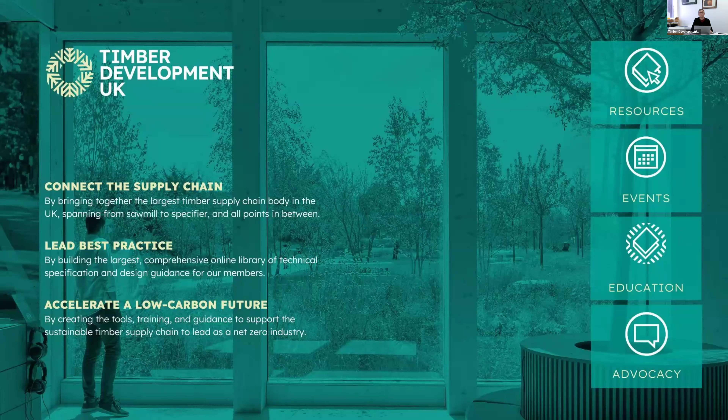Now we seek to achieve these three missions in a number of ways. One being webinars like the one you're watching. Another being the many other outputs that we have. You can see a couple of them there. There's Designing Timber. We have two flagship magazines that are printed: one is Designing Timber and one is Supplying Timber. They're packed full of innovative timber projects like the one that's the subject of this webinar, packed full of CPD and all the latest news about the timber sector and timber as a building material.

You can also see a couple of examples of the documents you'll find in our knowledge library. Our knowledge library is crammed full of timber knowledge sheets, such as the one you can see there on using SIPs, structural insulated panels. If you're interested in a particular timber methodology, you will find a timber knowledge sheet lurking in our library that will tell you all about it. It's a fantastic resource, and I suggest you make the most of it.

Another of our really good documents there, moisture management during construction. As many of you will know, moisture is an essential topic that you really need to understand if you're building with timber - how timber and moisture relate, all the things that are best practice when you're working on a timber project. And also you can see one of our case studies there, the Hive, a great demountable timber building. But you'll find plenty of other case studies on our website that can show you practical examples of the kinds of things you can build with timber and the challenges and opportunities that those buildings provide. Do make the most of our knowledge library.

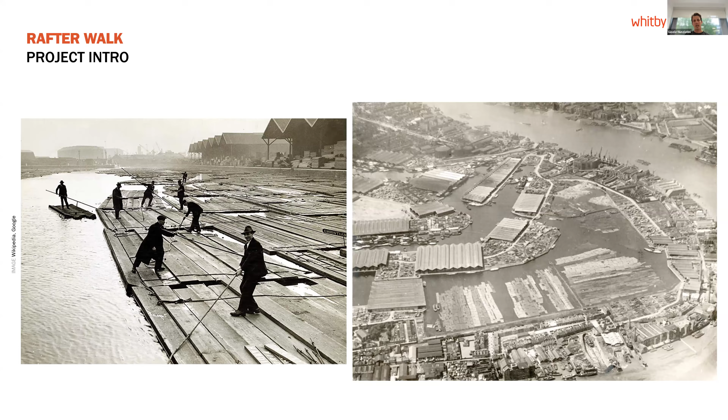This area then saw later redevelopment as, with the mechanization of the process, the need for these large docks shifted away from such a central area and shifted to a less labor-intensive set of operations. Being so close to central London, it was redeveloped in the 70s and 80s into a large master plan with a mixture of new housing, a bit of commercial space, as well as some green space linking them together.

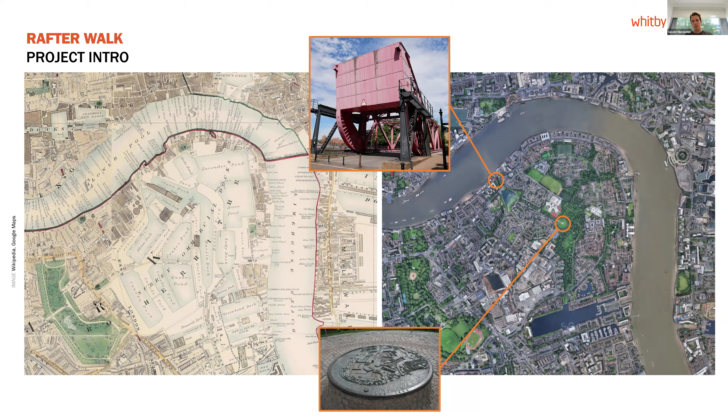So after this redevelopment in the 1980s, there's a more recent master planning redevelopment converting and repurposing predominantly the commercial area of the 70s development master plan into more of a central new neighborhood, taking advantage of the proximity to central London.

This has been pursued by the developer British Land in a joint venture with Australian Super to redevelop the area you see hatched in red between what's left of Canada Water and Greenland Dock in this area. So this whole predominantly commercial area is being redeveloped.

So the last bit of project introduction, setting the scene, basically focuses on Canada Water as a key part of this multi-year master plan, part of which was exactly Rafter Walk. This phase focused on the redevelopment of the dock as a whole, with a construction cost roughly split between 50% on landscaping and redevelopment and refurbishing of the site of importance for natural conservation.

So basically the landscape and the marshes around it, as well as this new link structure, this new boardwalk that is referred to as Rafter Walk today.

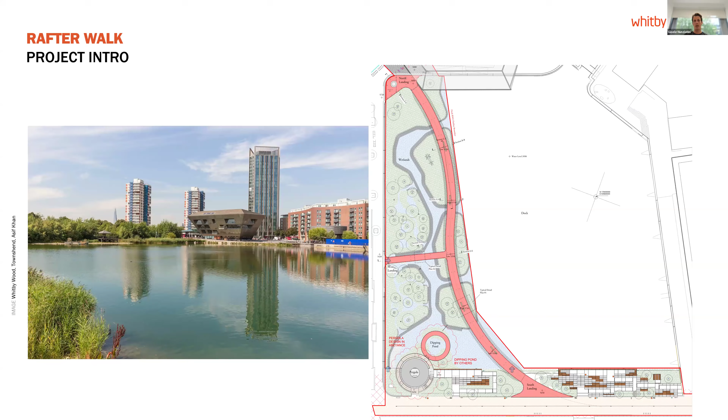So linking that history and heritage of the site to what is the design intent couldn't be done without an artist statement by Asif Khan, artist and architect behind the conception of this structure. I've put the entire statement in here. This presentation is being recorded, so someone can go back and read it in more detail.

But the key passages here that really express how that heritage has been fused with the proposal and the design that has ultimately been built are the two highlighted in yellow, which I'm going to read for everyone.

At Canada Water, I've been working with form, color, and rhythm as abstractions of motion and memories from the history of this dock, its timber cargoes, and forests and rivers of Canada from where the timber originated. Asif continues by saying: the bridge is a chronograph, a drawing that records time, capturing the motion of these individuals. It's easily forgotten that forests on the other side of the ocean helped build London. Many layers of that story are embedded here.

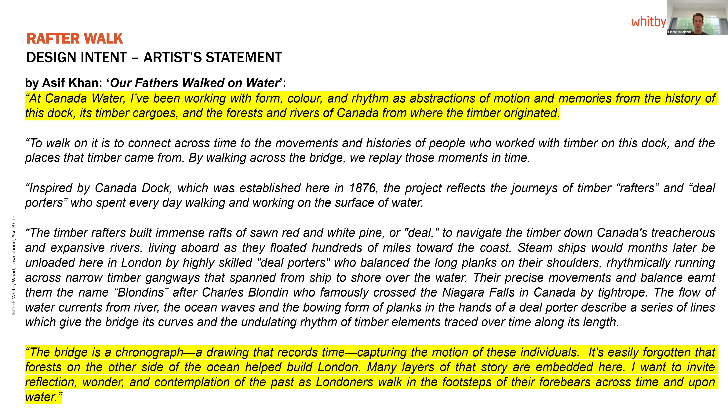I want to invite reflection, wonder, and contemplation of the past as Londoners walk in the footsteps of their forebears, across time and upon water. So you can see how the history and heritage of the site has been a key element in the mix, producing this design intent.

Here's just a quick overview of the defining aspects of that design intent. Obviously the shaping plan, as well as that undulated elevation profile, are key hints of that heritage being translated into form and baked into this structure.

There were a series of parameters explored through the design studies carried out in developing this concept. We spoke about the plan alignment and vertical undulations, but every other aspect was explored too. The design constraints from the site were limited in terms of clearance required underneath the bridge, which allowed the design to develop and stretch in a very different way, ultimately converging on this solution and proposal that's now been built.

So the pier design, the number of piers, was explored. The materiality was a big one, as I'll cover briefly, and then Martin will cover in more detail regarding timber specifically. But there was a great level of study done on the primary structure, the decking, the parapet, and the architectural fins.

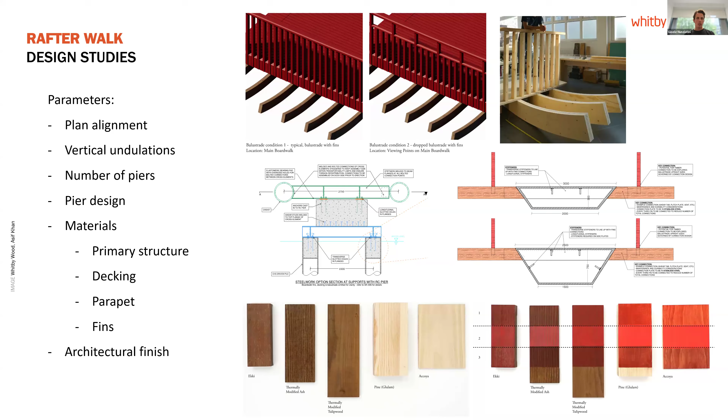Ultimately, the architectural finish, which is the first aspect of the project that the end user will experience, was also explored, but that was done in association with the materials and the overall combination of these parameters. So these design studies and this design intent culminated into a design solution, which we'll give you here as a summary, and then go into more detail into each one of these structural categories.

In exploring the materiality, there was a great deal of consideration given to durability, maintenance, sustainability, and so on. All of these came together and converged into this design solution and arrangement of different materials.

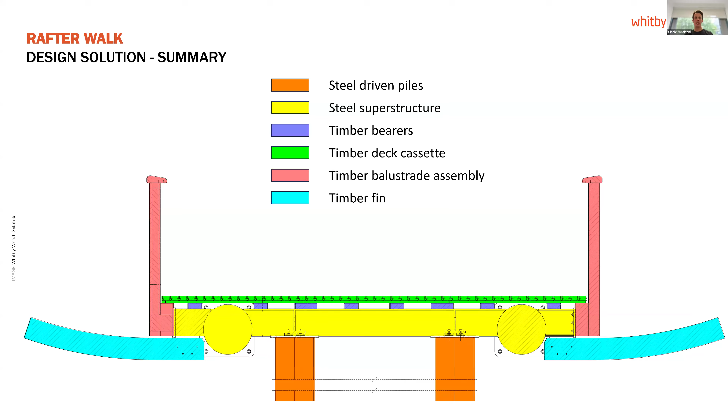So I'm going to now dive into each one of these aspects a bit more to give you an overview of why they were designed as such.

Starting with the substructure, what I like to always say is that no matter what the structure is, it will ultimately always be founded onto the ground, such as this one. So we had to deal with and mitigate the unknowns in working within an existing historical dock that in the past 170 years or so has been infilled, reshaped, and created this layer within the dock bed of made ground with obstructions and a risk of UXOs.

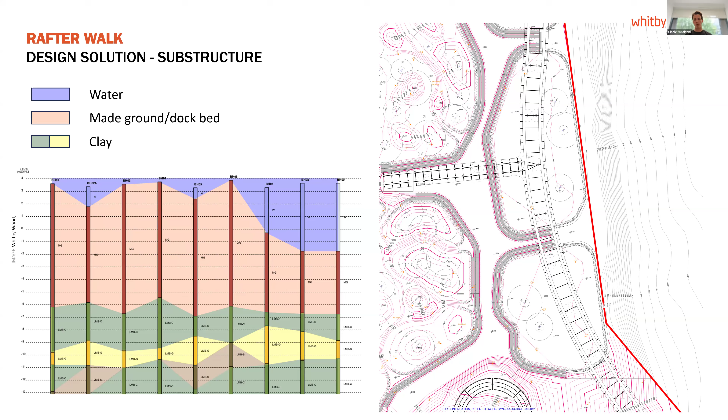This area was heavily bombed during World War II. So there was this element of that layer of made ground that we needed to digest and understand whether it was suitable or not. Here's a more diagrammatic representation of the typical soil profile, ground profile, and the proposed substructure.

Due to the level of uncertainty, it was soon determined that the made ground was not fully suitable for structural application, certainly for ultimate stability. Therefore, the structurally relevant profile is more like the one in the middle, where we have a layer of about 10 meters of unsuitable water and dock bed before reaching structurally competent strata, such as clay, where our foundations can transfer vertical and lateral loads. So our static scheme was more akin to the diagram on the right, where we had 10 meters before any lateral or vertical loads could actually be shed into the ground by the foundation system.

This means that although the Rafter Walk itself, the superstructure, is quite shallow to the water and to the landscape islands, from a structural point of view, it behaves more like a tree top walk, 10 meters in the air.

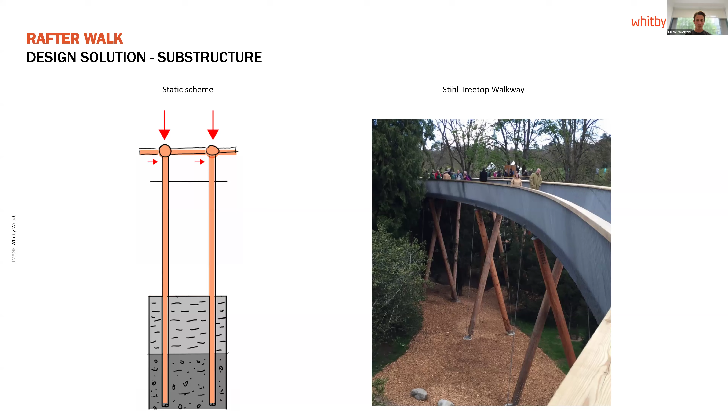So that is a key consideration that we needed to keep in mind in terms of its lateral performance and behavior against dynamic loads and thermal loads. As a summary, this is the substructure solution.

The predominant solution for the Rafter Walk and its link bridge was pairs of CHS driven piles. Quite a positive story in the fact that we were able to reuse an existing stock of steel tubes and repurpose them as steel-driven piles.

There's a bit of a sustainability win in there. And then when we come to the ends of the north and south abutment, we needed more laterally competent restraints for keeping the overall stability of the structure in check against its desired performance.

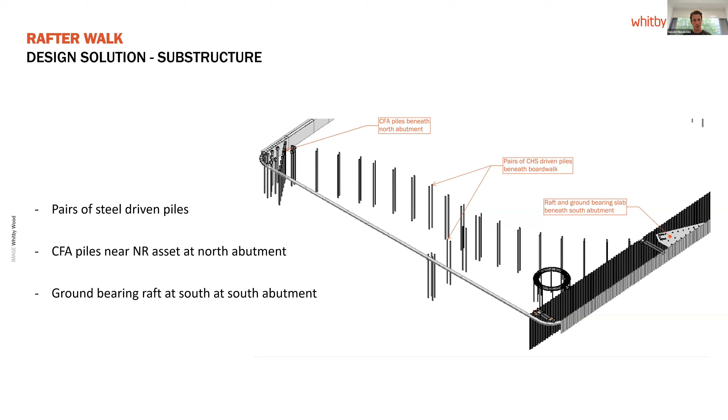So we have a ground-bearing raft solution at the south abutment onto ground stabilized and ground improved dock bed, as well as CFA piles at the north, closely spaced. The change from steel-driven pile to CFA pile was partially driven also by the proximity to the underground network rail asset in the form of the masonry tunnel for the overground line that goes through here.

Moving away from the ground and into the superstructure, the main bridge forming the key central portion of Rafter Walk has a simple ladder-like plan structure with the arrangement of two primary longitudinal CHSs coupled by primary cross elements highlighted in yellow. These primary cross elements had the function to take the loads back and connect them to the piles, represented as a pair of circles at either end of this plan view, but also to couple unbalanced live loads between one side and the other of this boardwalk.

The width of the boardwalk is 4.2 meters, so it could have some unbalanced live load pattern from one side to the other that would generate torsion in this ladder, and that was taken out by pairing the elements and coupling them with cross elements.

Secondary cross elements and cantilever stubs also have structural function, but it's more related to supporting the balustrade assembly as well as the decking solution, which I'm sure Martin will cover in more detail in terms of sensitivity done there.

The key consideration here, clearly visible in plan, is how the primary longitudinal CHSs are slightly recessed from the tip of those green cantilever stubs, as well as how the piles are then further recessed in rather than placed underneath the primary CHSs.

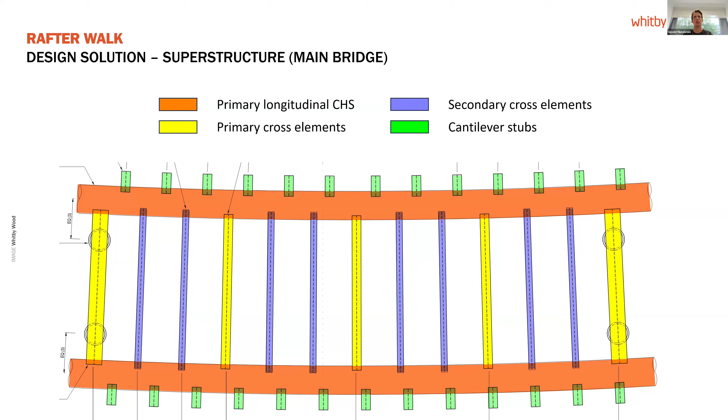A similar solution and design philosophy was adopted for the link bridge. The link bridge provides access to the middle of the main bridge of Rafter Walk, and at the same time works as a key lateral restraint for that lateral behavior we spoke about just a minute ago.

Due to the simpler geometry, there was no requirement to use CHSs. This was straight in plan and with a sloping elevation, but without any undulation, so it was easier to use open sections and streamlined fabrication.

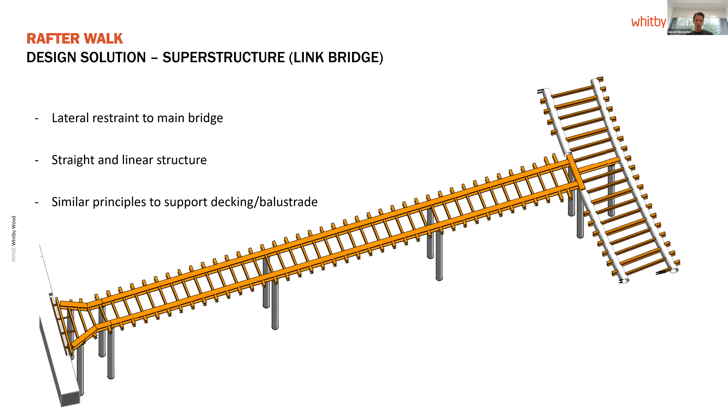Moving to the ends of the main boardwalk, we find the abutments. As I said before, these needed to be able to take lateral load independently without being connected to the existing dock walls, due to uncertainty regarding the capacity of the historical portion of the dock wall.

So this took the form of steel structures, again clad in timber, using the same principle, extrapolating the same principles for the balustrades and the decking as the main boardwalk, but essentially with more lateral capacity in the form of a U-shaped shear wall at the south and introduction of some vertical bracing in the north.

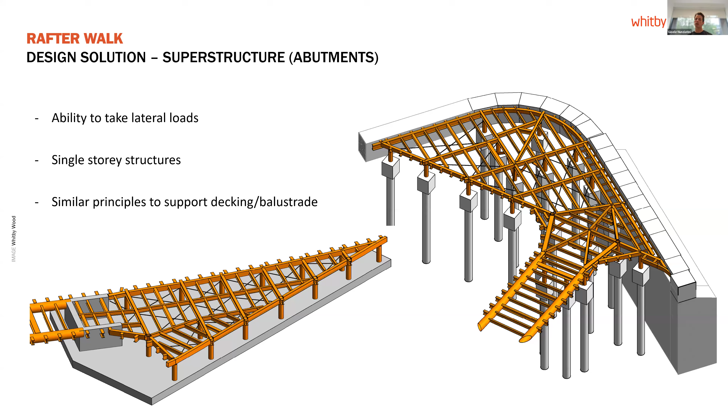Moving on to the details, I'm just going to touch base upon this. Martin will go into more of an in-depth review. There was, during stage 4.5 and stage 4, as well as throughout stage 5, a great level of conversation with Xylotek as main timber contractor.

As well as the main steel fabricator, in terms of understanding the interfaces, understanding the fabrication challenges from one material to the other, site tolerances, and as well as trying to optimize as much as possible the level of details.

So digesting what is an undulating S-shaped type of geometry with ever-changing angles between the steel and timber elements, and trying to streamline it into a type of detail that offered the maximum repeatability. There were typical details and bespoke details. We had to think about how to marry different materials, how to marry the superstructure to steel-driven piles, and take out those tolerances. But I'm sure Martin will go into more detail about the intricacies of these aspects of the design.

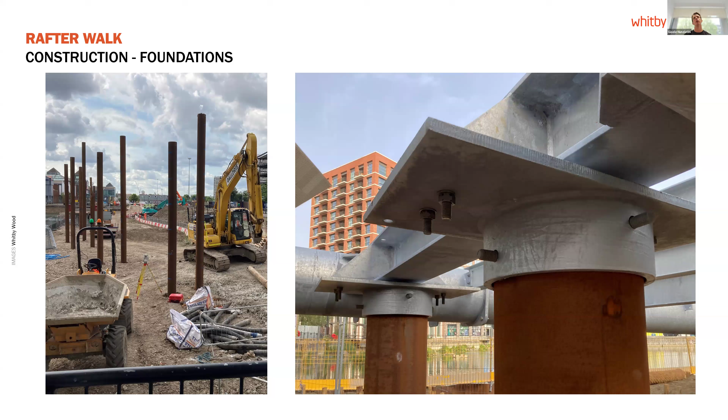Steel was entirely fabricated off-site, delivered to site in the largest sections possible, and then erected onto those plates and bolted together so that steel construction on site could happen quite quickly.

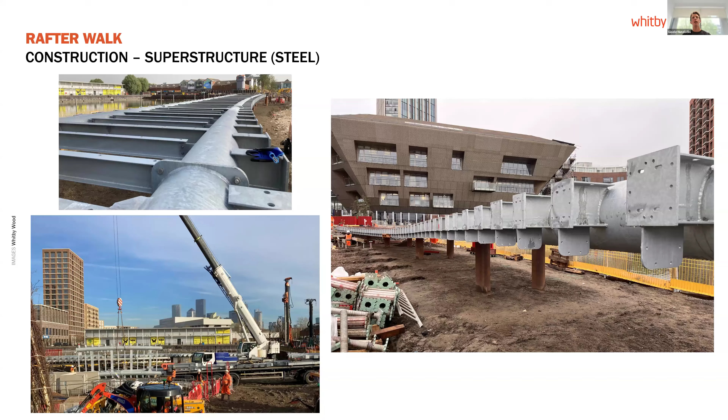And then timber started coming on - again Martin will cover this - but as much as possible favoring off-site fabrication in terms of creating modules, cassettes that could be brought to site with the minimum amount of site intervention, just adapted for tolerances and geometry to suit.

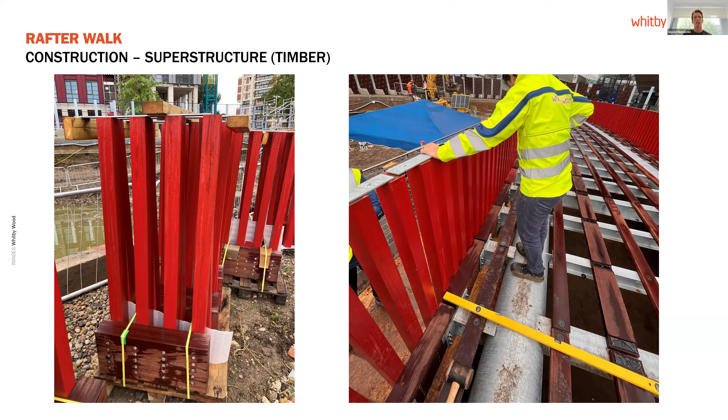So the balustrade would come on, then the bearers supporting the decking cassettes would be installed with some elements of site adjustment and site drilling, and then ultimately the cassette would make it to site and deck out the entire boardwalk.

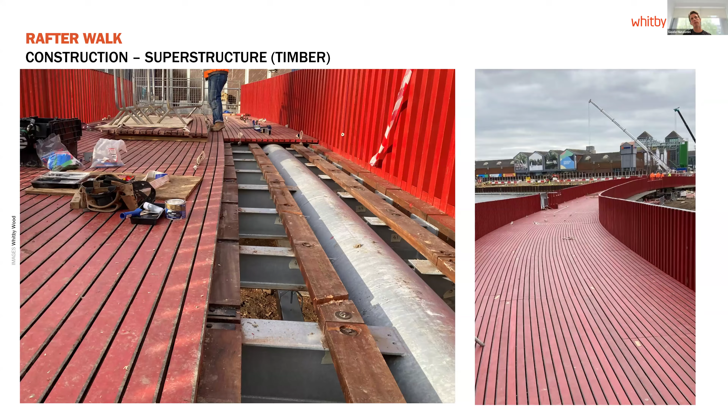Last but not least, the finishing touches. We spoke about the architectural fins that project from the underside - those were some of the last pieces to be installed, same as the site-finished handrail, and touching up of paint as and when required.

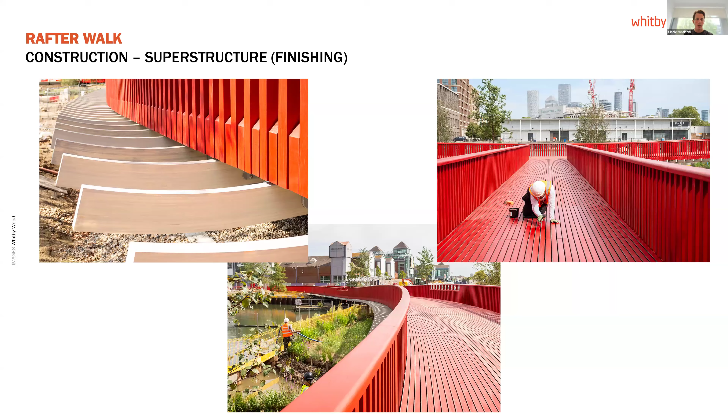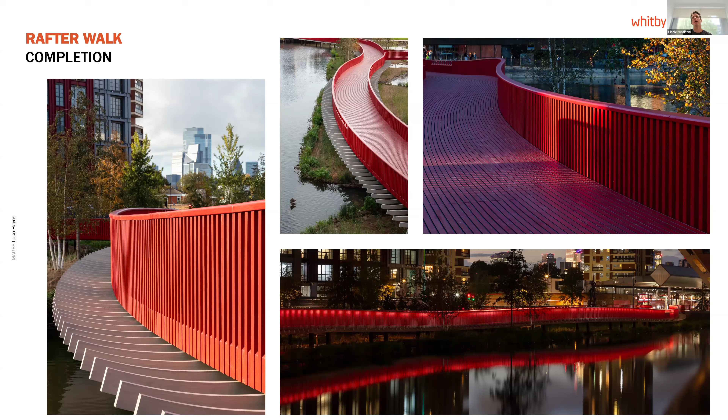So that brings us to completion. A couple of nice pictures here for those that haven't been there in person or haven't had the chance to go yet. These were taken just after its inauguration, and you can see from the bottom picture how carefully hidden away and designed the lighting was, so that it's not visible during the day, but through its dimmable features can be used to enhance the form of the structure and its appearance at nighttime.

That brings my part of the presentation to a close. I'm just going to stop sharing and pass it on to Martin.

Great, thanks, Joel. Fantastic introduction and handover. So yeah, I'll talk a bit more specifically about the timber elements and the process of their detailing, fabrication and delivery on site.

Just to introduce myself, I'm Martin Self, design director of Xylotek. We are specialist subcontractors doing timber structures and also consultants, so we get involved in projects early and help steer them into realization. We specialize in non-standard structures, so quite a diverse portfolio - non-standard in different ways, whether it's complex site conditions or complex geometry - looking to enable timber projects where there's a challenge to solve.

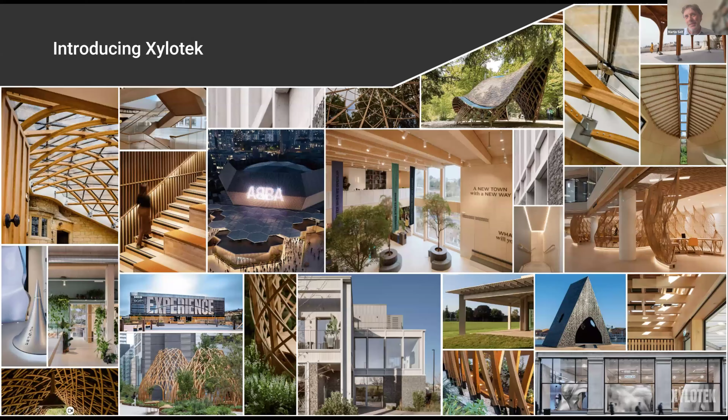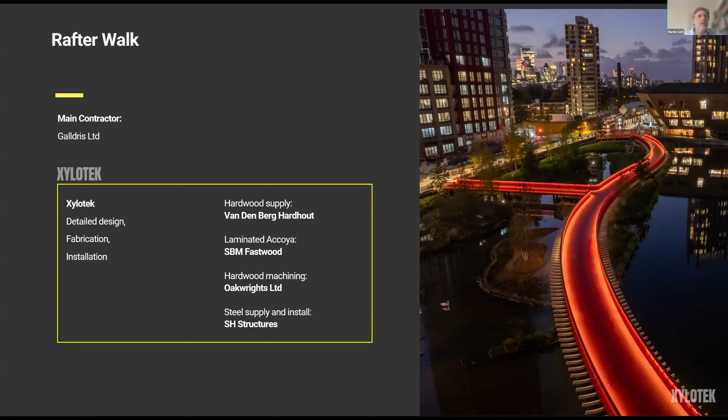Let me just pick up - that was the Xylotek introduction page, just a sense of our portfolio and the mix of projects. Here I was listing the team with us. So I mentioned Van Den Berg, the hardwood suppliers, a Dutch company - the Accoya, the material of the fins, came through SBM Fastwood. The key machining was done by Oakwrights in England, so we worked very closely with them on the DFMA process. The steel was by SH Structures.

So I'll talk about how we turned this into reality - how we took the engineering and architectural principles, clearly conceptualized but not yet ready for manufacture and realization, and went through those stages of taking that stage three level intent into something realized. Maybe just to recap some of the principles behind this.

Steel substructure, but the visible and contact material is all in timber - that's the prime element of the expressed structure. It's a 120-year life; durability is really key. Then there's a key element of modularity and the ability to pre-assemble, bringing elements efficiently to site and doing an efficient construction assembly on site. There's a clear hierarchy between the elements of steel, the substructure, the balustrade, the deck, and the architectural fins.

I think maybe to mention there's a real tactility and solidity. If you feel this structure, it has this fluidity, but also a very good sense of the density of the wood. You can touch it, you can really get a good interaction with the materiality.

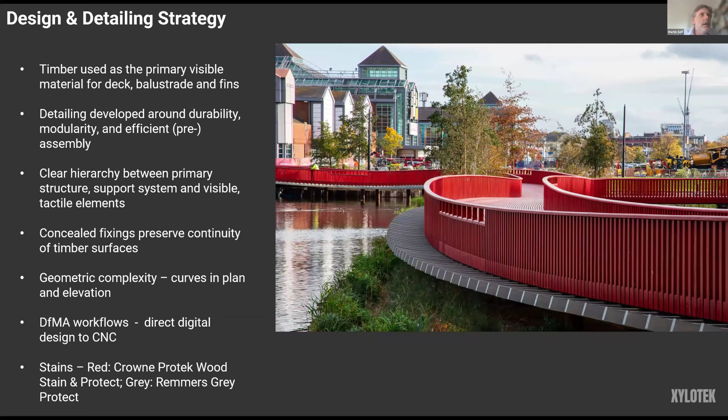So I'll talk a little bit about the timber supply and the procurement. Then I'll go into specific elements - we'll talk about the balustrade, the deck, how we delivered those, how they developed, and then how everything came together.

It's a major piece of London infrastructure - I think actually the first long span water crossing since the Millennium Bridge. It's a key landmark feature, so a long design life and durability are absolutely essential. Right from the outset, it was driven by the need for durable hardwoods to be deployed in this, and for it to be done through full FSC certification, with absolute clarity on the chain of custody and the sustainability of the sourcing of that wood. Various stages were gone through there, with different options and commercial considerations.

I think the Eki that was in those original considerations evolved into the Cumaru and the Red Angelim that I talked about here, Brazilian supply.

Just to mention as well, those sculptural fins that sit to the side - they are purely sculptural elements, capturing the flow of the form. They're made of Accoya, that acetylized pine material that's then glue laminated into those curved pieces that stick out the side.

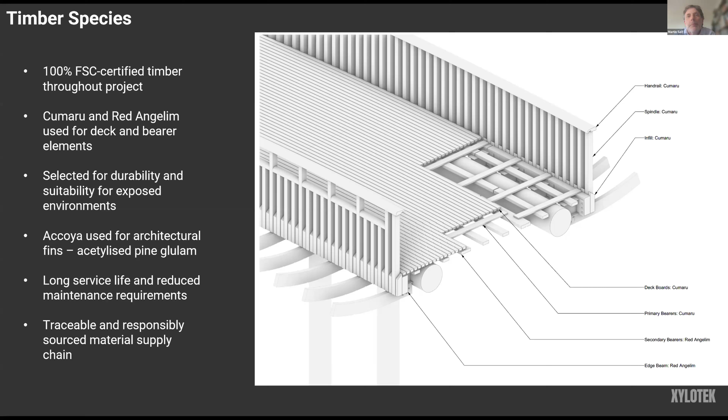Maintenance considerations are obviously key, and fundamentally the supply chain consideration is really important. Just a bit of data on those species - dense tropical hardwoods, I think in the pea family, growing up to around a meter diameter, both highly durable, class one, both in that high strength D50, D60 category.

The red angelim is more consistently red. The Cumaru actually varies a bit between yellow and a redder color. Both are around the density of water, so you don't want to drop it in a lake - it would sink potentially.

Hard to work with, particularly the Cumaru, tough on the machines - you have to pre-drill everything. You really have to think about the manufacture because it's very different to even an oak, a UK hardwood, very different to work with, and very, very different to a softwood.

Interesting - the red angelim has a rancid smell. There's an acidic kind of chemical within it that gets released as you're working with it.

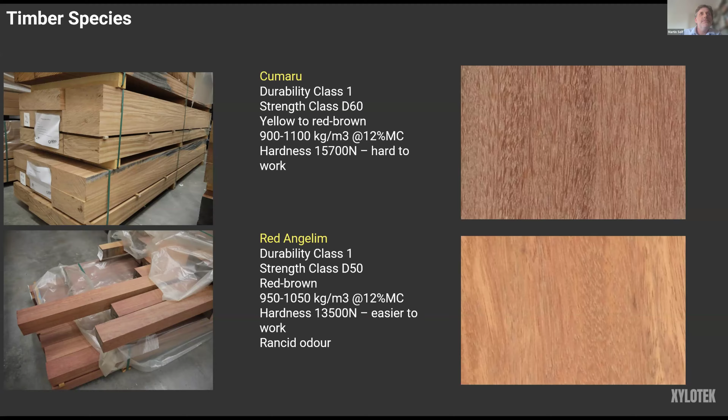So as I was mentioning, the chain of custody and confidence in the sustainability was really key. Vandenberg's are the leading European FSC-led international hardwood supplier. We sourced through them, which gave very strong confidence to the client and the wider team that we were sourcing responsibly.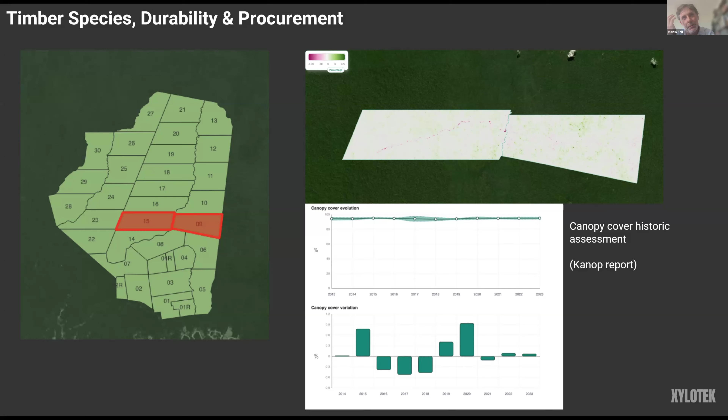British Land actually commissioned independent assessments to audit that supply chain as well. They went right back to the data and plot from which the trees were sourced, and this company Kanop did a retrospective analysis of satellite imagery of those plots to track year on year the change in canopy cover as a measure of sustainability of the forestry there - confidence that only a small percentage of trees were being felled, in a way that preserved the full ecology of the woodland.

Okay, so I'm going to talk about a couple of elements in particular which illustrate the process and thinking. The balustrade design is, in a way, quite a simple thing - some vertical spindles, a handrail, and a way of fixing it to the main bridge deck. But the complexity comes from that curvature, which brought some interesting considerations in how we reconciled the fabrication, pre-assembly, and assembly with that geometry - that's the story I'll tell in the next few slides.

The left image shows the radial setting out - there's an 80 meter and a 90 meter radius. I think the top segment in the image is the 80, and then it goes to the 90 in the other part. So there's a sort of rationality to the curvature in plan, but there's also curvature in elevation.

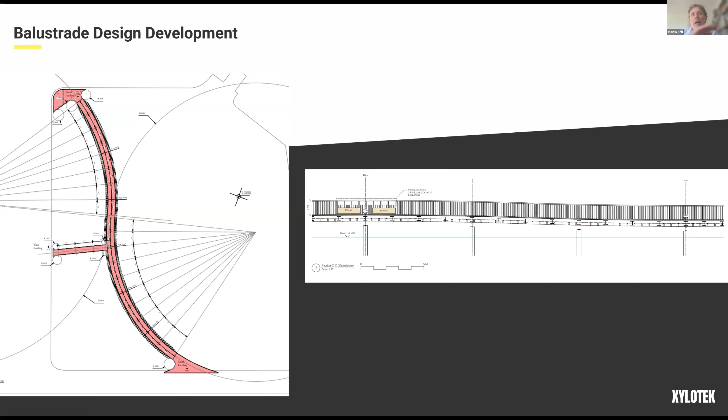So it basically means there's no real commonality in the balustrade elements. We went down the route of accepting that every part of the balustrade would be geometrically different, worked with that, and then worked through a logic of assembly that allowed that to happen easily. This captures some of the design evolutions.

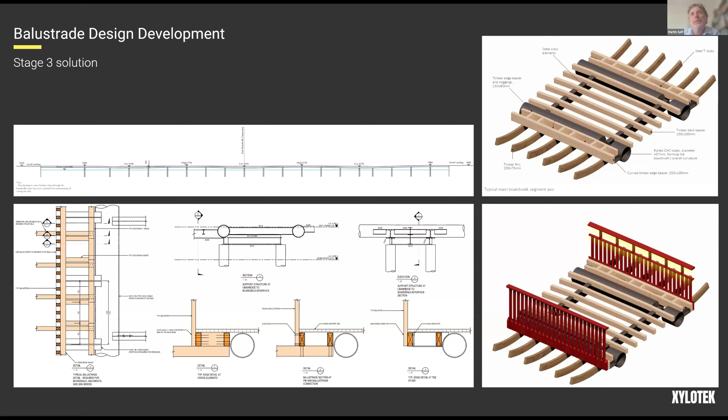So there's a lot of work done to think through how to evolve that into something more cost effective and easier to realize. There's a few moves - breaking down the balustrade panel lengths into shorter pieces.

You can kind of see here - using a shorter faceted element, just getting clear about the principles. Having an edge member that was straight and varied with the elevation angle, the up and down, but the spindles all kept truly vertical, pointing in the true Z dimension. So they were kept consistent, not changing angle with the curve of the bridge.

Lots of studies done about the relationship of the steel and the wood, and the possibility of the ladder and exactly what did what. The need to pick up the fins as well onto something good and solid.

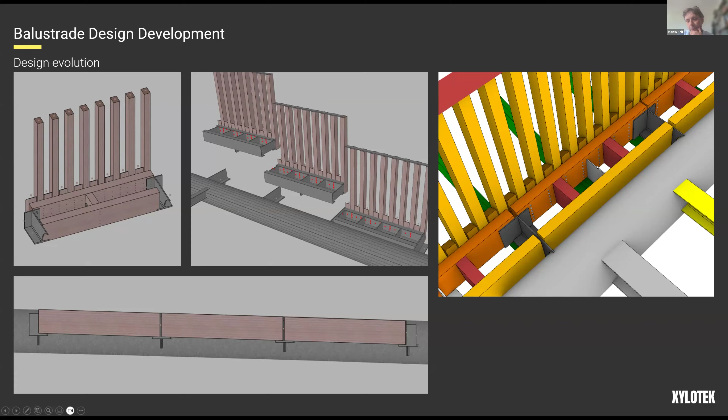So things ultimately came to, I think Joel showed this earlier, a simplification in a way of having a steel stub as part of the steel structure welded to the CHS, picking up a single edge beam in straight facets, and also the same element picking up the fin - spacing them at the fin dimension, bringing everything together, making the panel smaller, easier to handle.

I think just about two people could manhandle them into position, then bolted back with hidden bolts into the steel there that you can see, and then those infill pieces coming in at the end, cross-screwed in a hidden way so everything was tied up. You can probably pick that out in the right-hand image there.

Some of the spindles had holes drilled all the way through them vertically to pick up the cabling for the lighting - quite a lot of specific detail within there.

The right image now shows just the screw fixing of the spindles. Looks simple, but I think quite a lot of work for Whitby Wood to get this refined - getting the edge distances justified, getting an optimized relationship between the spindle dimension, the spacing of those, how everything tied together.

So, like Joel was saying earlier, a lot of very close interaction between us through stage 4, with the design anticipating fabrication, and the engineering and architectural working together. So everything was synthesized really well.

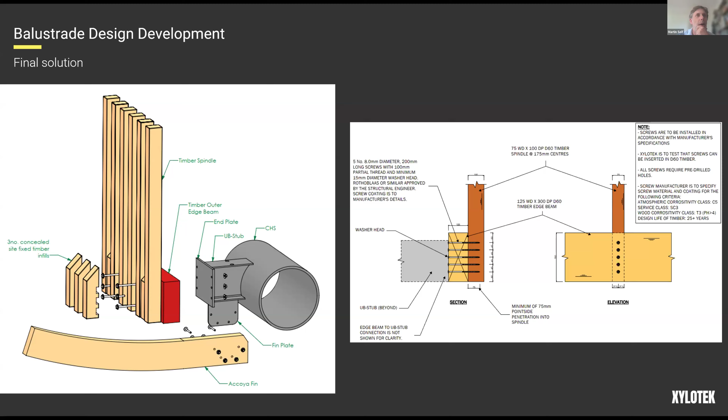So this is then the story about how these things were actually worked out. Let's talk through this a little bit.

So the edge piece, the bit that's bottom left nearest us with all those screw holes, that was fabricated by Oakrights on their Hundegger machine - a CNC machine, not normally used by them for oak framing, but used for the cutting of these elements, for drilling all the holes, all the counterbores, all done digitally.

Each one of those different all the way across the bridge - I think 500 or so different pieces, adjusting for the angles as it flows along. So a very careful definition of those digitally, fully three-dimensionally defined by us, and then fed into their workflow.

We actually, because we had the digital information ready to go and held in cadwork - the software that's specialized for timber construction - we were able to go straight into exporting the machine file, the BVN file that drives the Hundegger, saving a lot of time at the fabricator, at the machinist side. They could just take files in a good, controlled, organized way. We could sequence them in the order we needed them, straight into the machine fabrication.

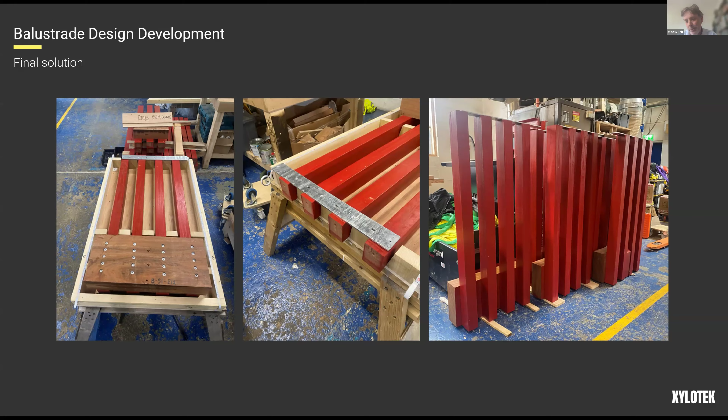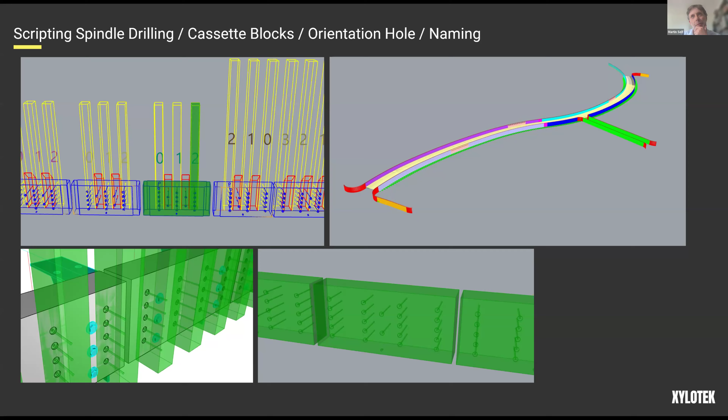So there's quite a lot of special conditions alongside the ones that are more consistent. As I was saying, we're modeling every screw hole because they're pre-drilled, every counterbore, every single screw in the whole bridge is modeled in the cadwork model. Tens of thousands of components to get an absolute definition of everything, and then control of all of that.

So naming of every piece, the sequence order, the specifics of all of that, how things will come, the simulation of the actual machining being done. So the Hundegger machine doing its operations virtually to give confidence that the reality could be made, that you can get the tool paths to work, that things don't clash.

That was a special piece, the one shown top right, one of the corner bits where there's some extra machining cuts to get around a curve.

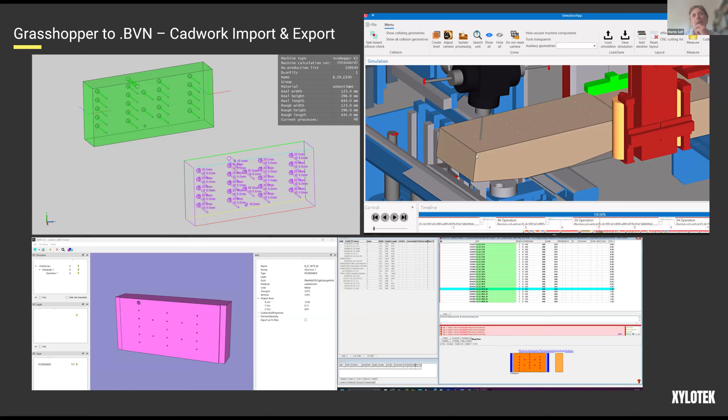Anything else to say on this? I mean, you get the idea probably. It's just a process of going from the global setting out geometry, the reference geometry logic that's defining those radiuses and curves in elevation, all the way through to the center line, the positioning, the setting out points, the structural center line geometry that Joel will be working with, through to the full volumetric definition of all of these features on every piece of wood, maximizing the automation of that where we can. Quite a lot of work done in Grasshopper and Rhino alongside the Cadwork work.

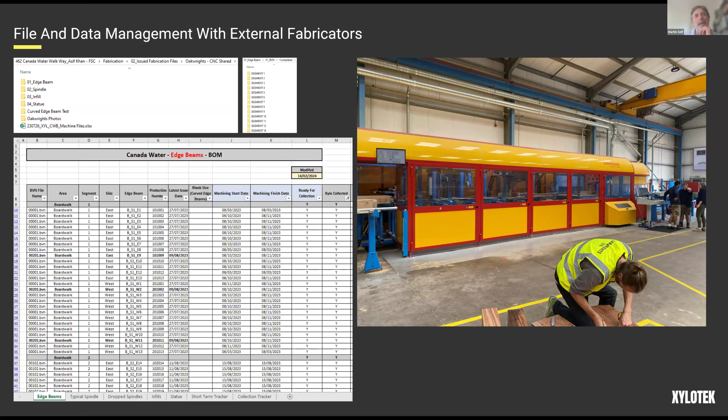That's a machine in the background and the sort of information we're giving. So we're asking them and really planning out day by day exactly which bits they're going to be doing, because we're then needing to feed it in - I think Joel's image showed the flow of the bridge, the construction going from one end to the other, that was the reality, so we had to sequence things carefully in an order that matched the assembly.

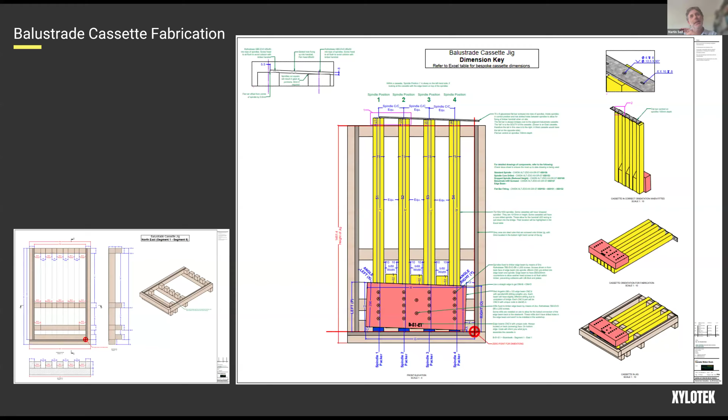And very simply, rather than doing a drawing of every piece, there's just a spreadsheet with the key dimensions, labeled D and C and B here, so the dimensions that would set the corners of the edge member within this frame. There's a series of these things made, and then the data for that driven out of a Grasshopper script. One of our team, Marina, worked very closely on this.

So yeah, Marina and Nate, amazing designers, spent a lot of time thinking through how to get all of this rigorously worked out and a workflow established that would give the data for this process, as a lot of it is done in the Grasshopper and Rhino world, outputting those numbers.

I think this just runs as a video. You might just about get a sense - you maybe see where my mouse is pointing that the edge beam is sort of moving around as it's working its way along the bridge, and those dimensions being adjusted in each position.

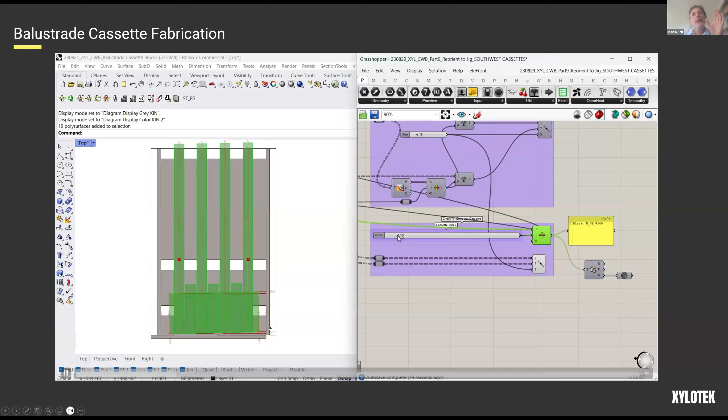So basically those millimeter dimensions are what are given to the team on the workshop, and then they set those against the tape measures here, all pretty simple, fairly robust, easy to check. There's a set of check dimensions as well as the set out dimensions.

So these blocks, which have come from Oakwrights, dropped in, positioned to the data, and then the screws put in. And that's it really. That done 500 times, producing these pieces. You can see here this bit of steel becomes the top plate, so that gets screwed onto the top. There's a line that runs through the top of the spindles over that, and the handrail piece gets fixed up through that steel plate into there.

I think if there's anything else to say about that, but you see the thinking behind it, how to take the complexity of the geometry variation into something that actually in reality on the workshop floor could be simple enough to be able to do consistently and efficiently.

There they are, the families of them going out of the workshop, sequentially going out, craned in, moved around. You can see the fixings that I showed earlier there coming into place.

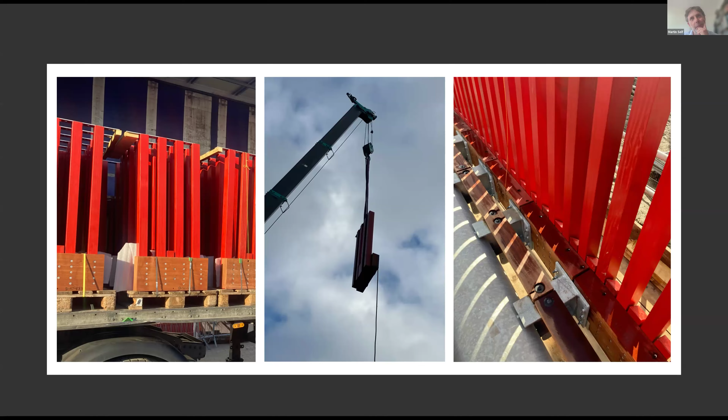So, the balustrade, maybe just to mention the handrail. This is actually the mock-up, a sort of softwood mock-up of the detailing there. So quite a bit of complexity in these. This is one of the more tightly curved bits.

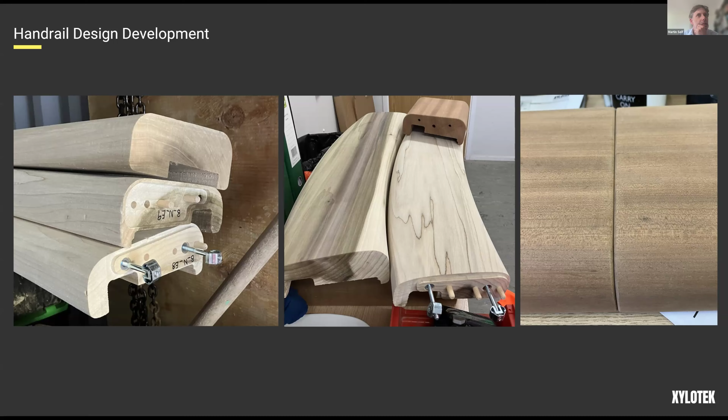I guess that leads us then into talking a bit about the deck, the other prime element. Another set of challenges here - again, dealing with the curvatures, that curvature in plan in particular.

An absolutely key architectural move was to run the deck boards longitudinally along the flow of the bridge. I think if you think about most bridges, you'd probably run the boards laterally - it's obviously easier to just run them perpendicular across. Running longitudinally and curving them presented some good challenges, and we'll talk through that for the next minute or two.

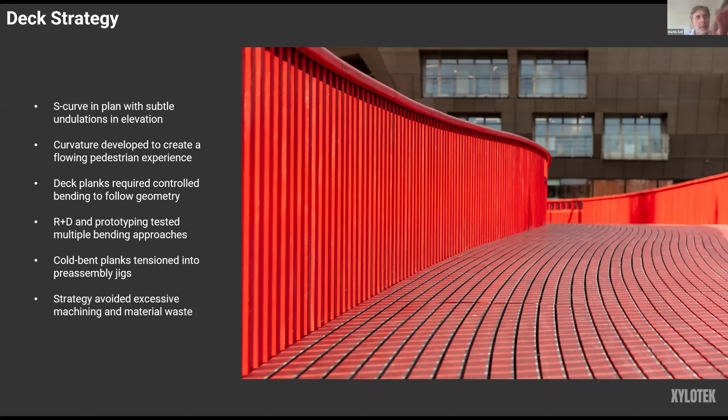So that flowing pedestrian experience was really key. Lots of R&D, lots of back and forward, lots of workshop testing, prototyping, and then back and forward with Joel's team, really trying to understand how we best do it.

Again, lots of variation, a bit less this time because we were able to run with the radial geometry. So there's the 18, 90 meter radiuses, the sets of panels, different lengths worked out in a way that the joins would always miss each other by, I think, 250 mil as a minimum. So long, short, medium lengths of the panels, self-similar along the oranges and yellows, and then different on the other set.

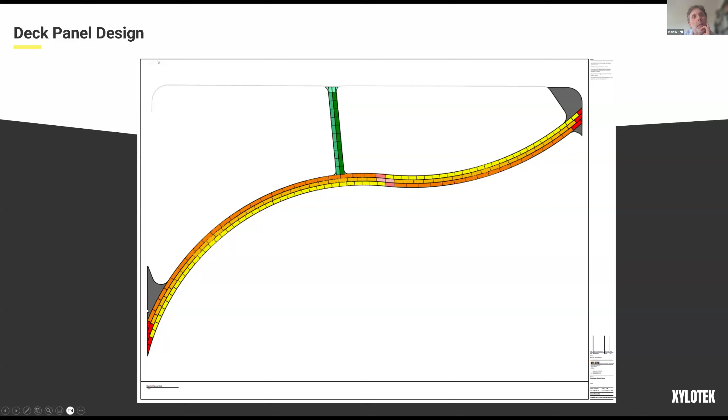So 6 standard ones, the straight ones on a link bridge, and then a bunch of specials at the ends in the abutments. And then the grey bit's actually done more in situ - those are patches of decking done at the abutment ends.

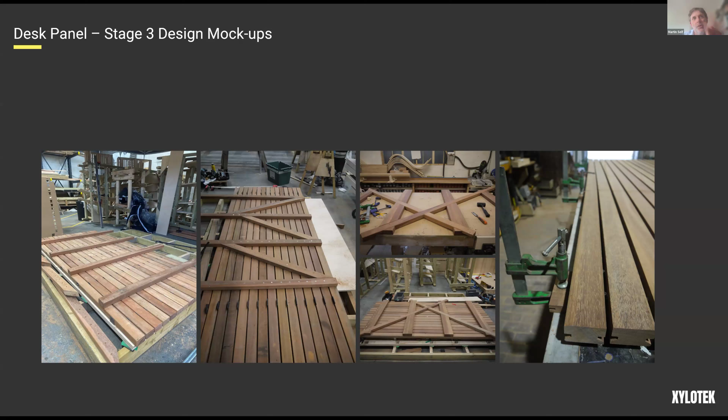Lots of early stage testing. The idea was to be able to curve those deck boards, and lots of different options were thought about. These are versions with an all timber deck, locking in curvature with a kind of truss arrangement in the wood.

This is testing the more extreme end of the curvature. The steam box in the back - so we tested steam bending, which is actually quite inconsistent and laborious, and probably too time consuming for this.

So the ambition was to be able to cold bend these, just elastically bend the pieces in the pre-assembly. Another option would have been to subtractively machine the geometry out, to take the profile out, because of the complexity of this profile, that has recesses for the fixing, a relief cut, another cut for the anti-slip strip to fit, to machine cut that in a curved shape. That's very complex in itself, and also wasteful because you'd be cutting a curve out of a wider straight plank, and this wood's very precious, so we don't want to do that.

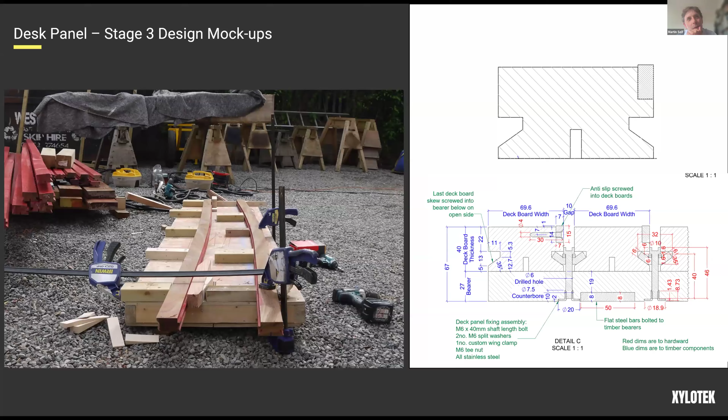So the process developed to go back to that truss idea, but to do it with steel cables. Below the deck, there's a couple of steel edge members, chord members in the truss sense, and then the tension cables, positioned where they need to be to lock the curvature in. So you could bend one of those boards by hand, but when you have 17 of them laid up, they cumulatively add up their spring back, so you really need to lock in that geometry really carefully.

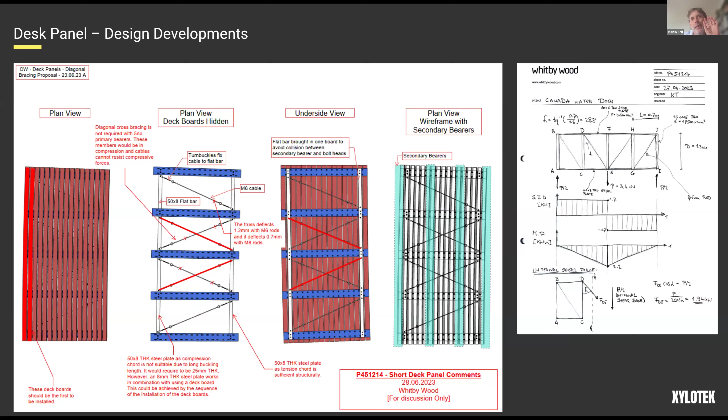So these are pre-assembled panels, done in the workshop, and then carried to site and dropped in one by one. These are the Whitby Wood comments on our drawings, just to show you the amount of backwards and forwards and refinement having to go on in thinking about this.

And here we are. This is now the reality in the Xylotek workshop. CNC jigs for each of those different conditions I was mentioning, setting the positions of the chord members, the secondary bearers, and then paths where the steel cables come in.

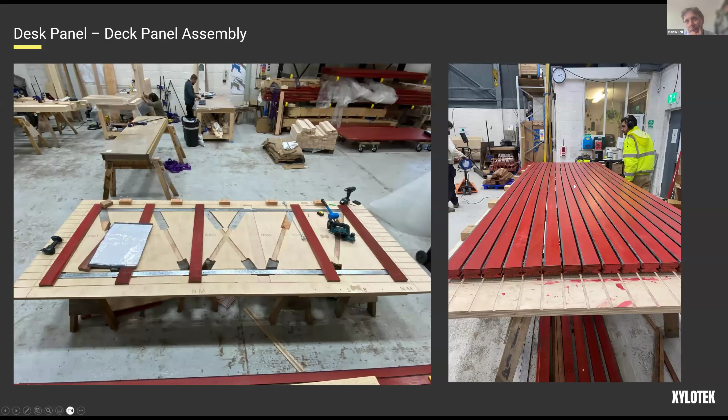You can get a sense of the curvature that's been locked in. The staining happens at that stage as well. Another view of the jig there with the cables coming in and the turnbuckles and the tightening that gives a little bit of adjustment if needed to get the collective curvature locked in.

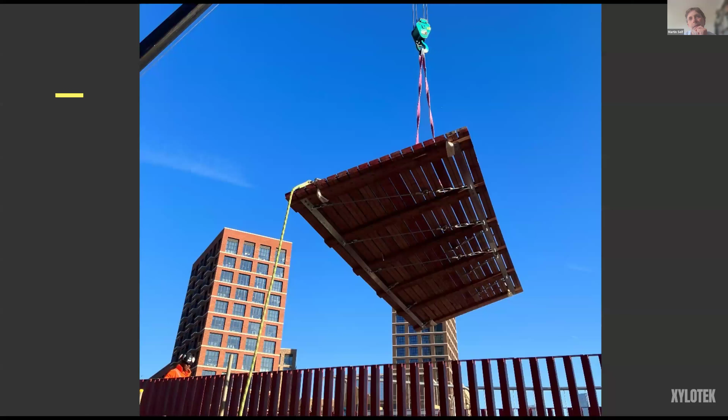There's a panel coming in, so very nice, totally pre-assembled, locked in. No need to deal with those springback forces on site. They're now self-contained panels and able to be flown in on site.

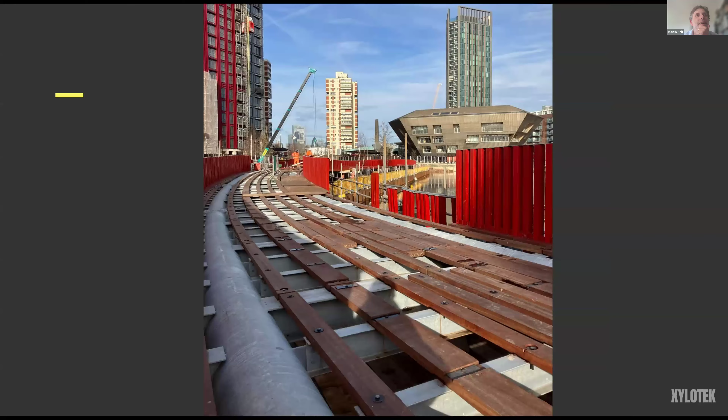I'm just going to rattle through some site pictures. You've already seen some. The steel and the primary bearers coming in, starting to move along there again from one end to the other. Now the balustrade pieces coming in, like we were talking about.

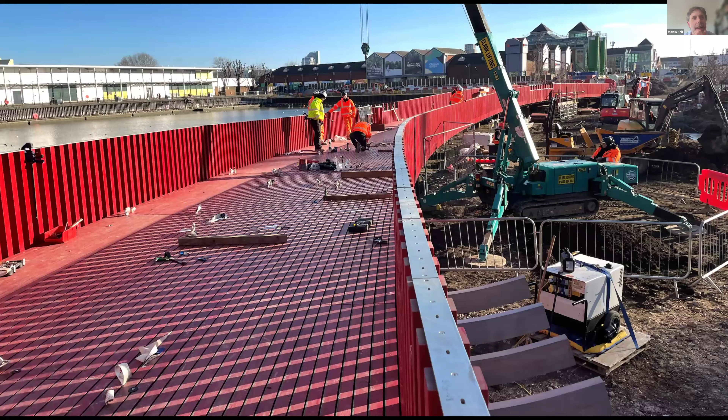More progress. Looking from the other end, deck panels starting to arrive on the right-hand side there. Some need to sort of shuffle and line up, but generally things working really, really nicely because of the care taken in the workshop to get everything in the right position.

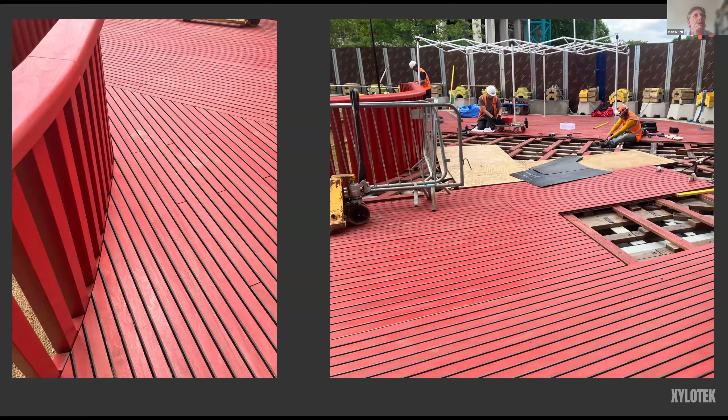The coil fins coming in. Mentioning those abutment areas where there's larger areas of decking, and some nice transition from the deck flow into just parallel planked zones.

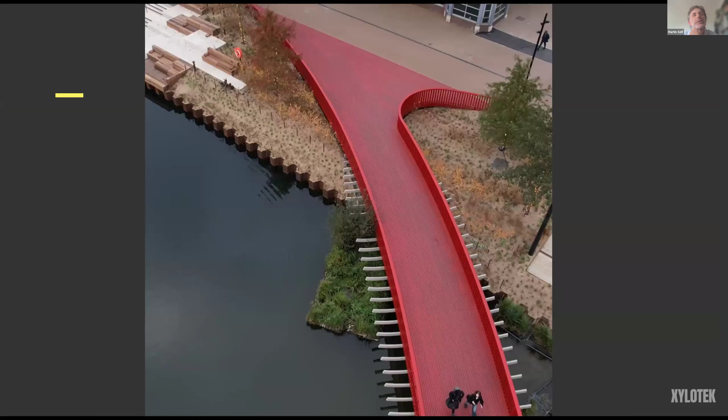Having to navigate the tight curvatures at some of those abutment and connection zones, so a bit of hand crafting, I suppose, on site to deal with those ones. But you get a feel for it there, just how the bridge nicely flows into that end zone.

Yeah, that's pretty much it. A couple more images.

We're probably slightly over time. Apologies. I guess, Joel, I think you were maybe going to jump back to just another little anecdote. There's another separate bit of structure that Xylotek didn't deliver, called the dipping pond, which has its own interesting story around some timber piles that Joel knows the story of better than me. So I'll hand over to him at that point. You can be very quick, Joel. Yes, yeah, will do. Thanks, Martin.

Back onto this presentation then. As Martin said, there's a secondary structure away from the main boardwalk, away from Rafter Walk, called Dipping Pond, later redubbed Discovery Pond, which adopted as much as possible of the same principles, that ladder structure, superstructure, and so on. But due to the smaller scale and lighter loads, smaller balustrades, no fins, we were able to actually use timber as a material for the piles, for some of the substructure supporting this.

Again, we used the similar ladder superstructure supported on pairs of timber piles. But these timber piles basically created some site challenges, because when it came time to drive them into the ground, unfortunately they hit some obstructions that meant the tolerances were greater than previously considered in the design. Further to that, the size required for driving them into the ground was larger than the size specified in our design for connection to the superstructure.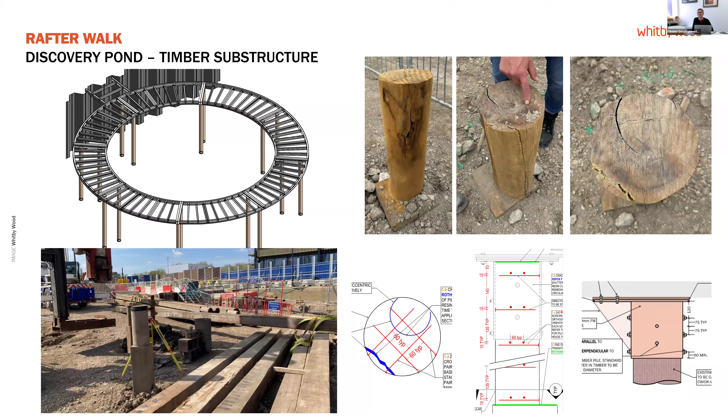We might overrun slightly. I'll just note that a couple of people asked about concealed fixings. For purposes of time, I'll mention that Gioele, you pointed out most of the fixings are visible from the underside of the structure, since people had asked about inspectability. You also pointed out that truly concealed ones were generally not crucial for the primary load path. I thought it was interesting how well you'd done that, the fixings that at first glance would seem completely invisible can actually be accessed from underneath for inspection. I don't know if there's anything else you'd like to say about that.

Between Martin and myself, we've shown this detail on the left that you can see here. These concealed infills with a sloping top wedge finish were used, and correct me if I'm wrong Martin, but fixed from the back to conceal the primary fixing. So you can inspect the primary fixings or remove some of these concealing elements to quickly inspect them from the outside. Everything else should generally be visible, either from the top, because the fixings of the decking are just recessed in between the decking - you don't see them but they're visible if you focus on them - or from the underside predominantly.

You also typed a very good reply to somebody asking about structural design life and durability considerations. I was going to ask about that too, in terms of corrosion and that kind of thing, with exposure to the elements, obviously moisture, both with the steelwork, the connections, and the timber. I'm wondering if either of you would like to say a bit more about that.

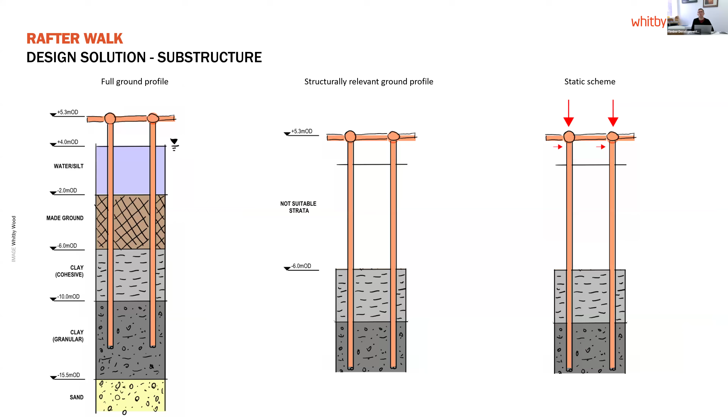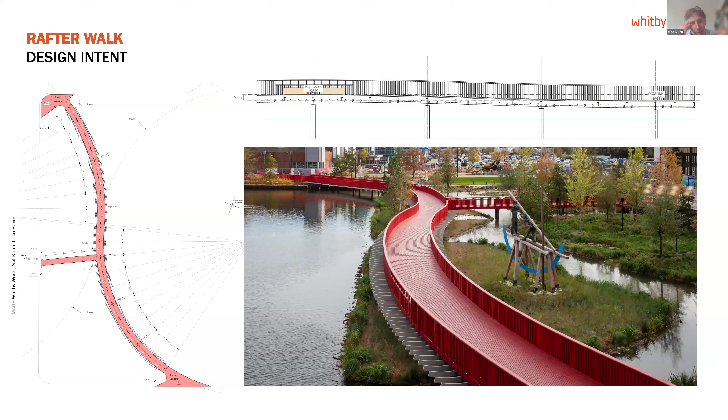In terms of the supply chain and lead times for ordering, were you able to find both the information you wanted on durable tropical timbers and also easily source them in good time for the program? I think there were challenges - I probably wasn't super close to that myself. I think the wider team had anticipated this. Gioele, you showed it, didn't you, the early thinking about material procurement.

I think that did go through some sort of evolution as Xylotek got involved, and we really looked at where the material could be sourced. Certainly the lead time was, as it always is, a sort of challenge to find who's got what material in what dimensions in the right place. I think part of the mix of the Angelim and the Cumaru was driven by the availability of different section sizes in stock.

These trees weren't felled for the project; they were held in a timber yard in certain section sizes. There was also consideration of sap and what state the material's in, making sure we got that super high quality needed. There was quite a QA process, so more was ordered than needed, and quite a lot of material was rejected through that process.

But because these materials are non-traditional hardwoods, it was hard to find all the design parameters and mechanical properties. There was a lot of research involved in trying to find, test and check all of that. For some of the screws, we actually had physical testing done with samples to confirm the capacity, which Rothoblaas was very interested in.